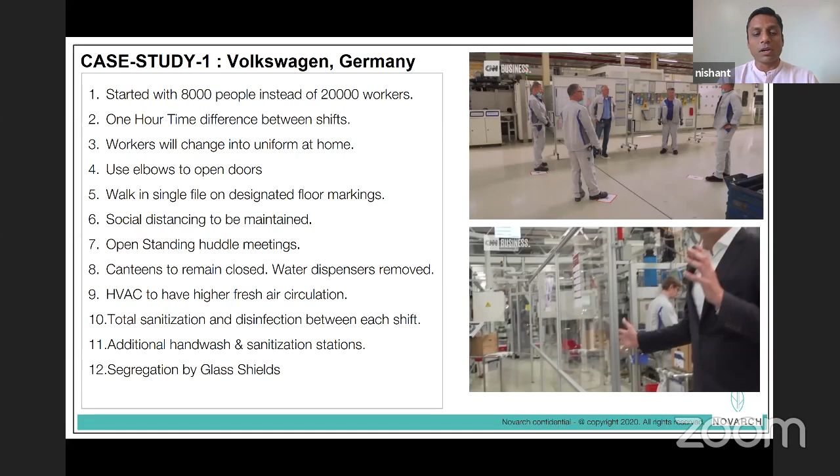The second case study is from Amazon fulfillment centers in India. They've implemented social distancing through simple floor markings. The cafeteria has been reconfigured for lesser seating while maintaining social distance. They've put in temperature scanning and thermal screening machines at various places, implemented sanitization stations, and for high traffic areas, plexiglass or barriers as well as PPE kits for all the people who man those areas.

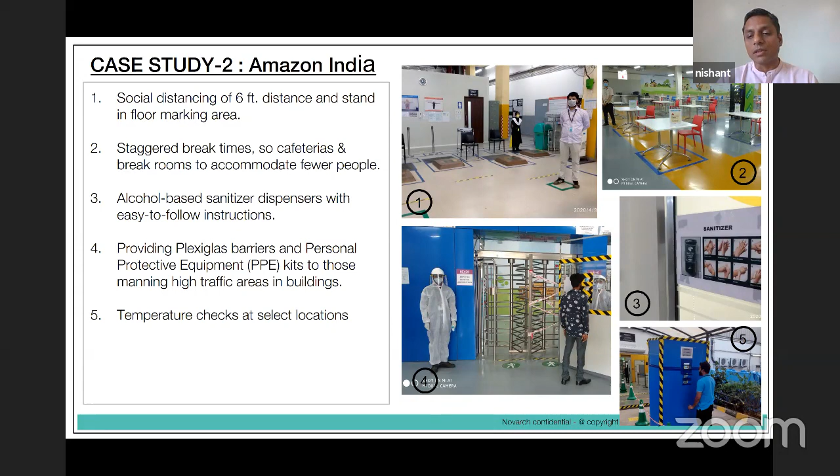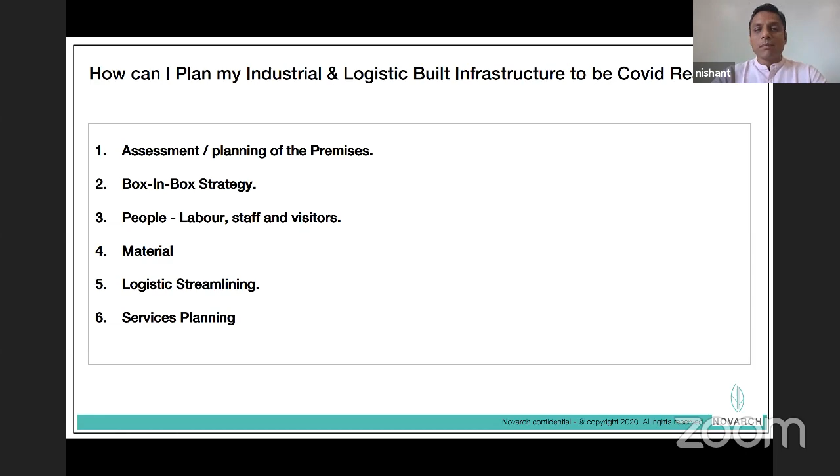So how can I plan my industrial and logistic infrastructure? We're going to talk about 6 main parameters. The first of those is something we call assessment and planning. Now this is extremely important.

For you to take a holistic approach, you need to sit down with your team and make charts for each and every item. How are you currently managing the workflow, the materials, the people, the visitors? How do you currently stack your material? What are the logistics of it? How does it come in, how does it go out, how does it flow within the premise? What are the various administrative or laboratory requirements you currently have?

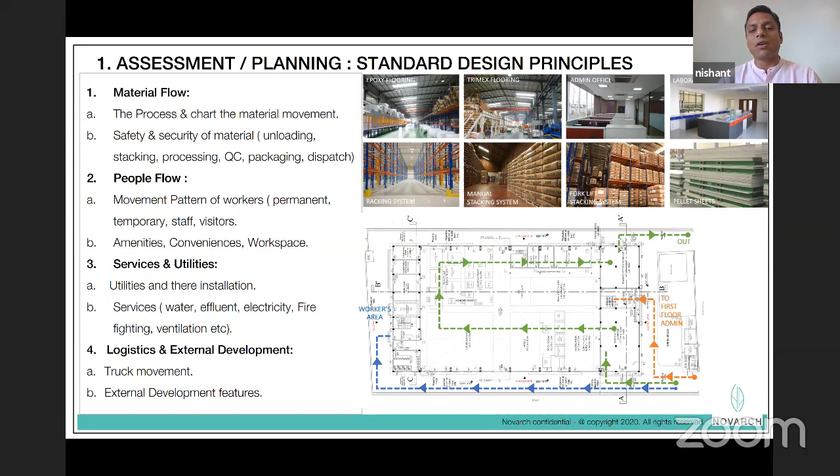Once you have all the information collated, you can implement solutions which are not haphazard but look at the entire picture in one go. If required, hire an expert to do it, or designate one of your project managers in-house to make these sketches, take photographs, and put everything together so you know exactly how your factory is functioning on paper today.

The second thing, a term we've coined, is called box in box. We're doing this in a lot of our projects currently. If I show you a typical factory layout, the area in the blue line typically tends to be a large production hall, probably of metal construction, a pre-engineered building, high volume with cranes running and things like that. We have machines and various departments scattered all over depending on material flow and how the factory is operating.

Now what we've brought in is that we've made boxes within. So make sure you channelize or earmark departments. For example, in this sketch I've made 4 departments: the first is fabrication, then 2 process plants, and then a QC packaging area. So try and segregate these departments.

What you'll have is a clean central line for all the material movement. Once you've segregated and implemented a box in box, you can start innovating, like staggering the in and out times of the workforce for each department. It could just be a 10-minute stagger. But as Vishal asked, how do you manage the queue? He's got more than 300 people working on a shop floor. So once you've got a department-wise, even a 10-minute time stagger for each department, it actually goes a long way in managing the queues for entry and exit.

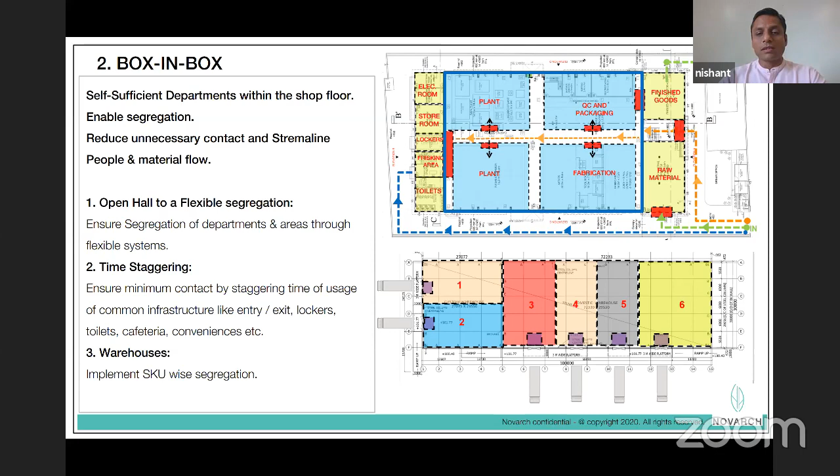Similarly, this is a large industrial cluster project of ours with numerous industrial units within the same area. We've started putting thresholds at the entries, in front of the institutional area, and at the beginning of the large common amenity area where the warehouses, power plants, sewage treatment plants, cold storage, etc. are located. There are also thresholds at the beginning of each individual unit, so you can limit contamination and not worry about it entering your premise from someone else's premise or an external source.

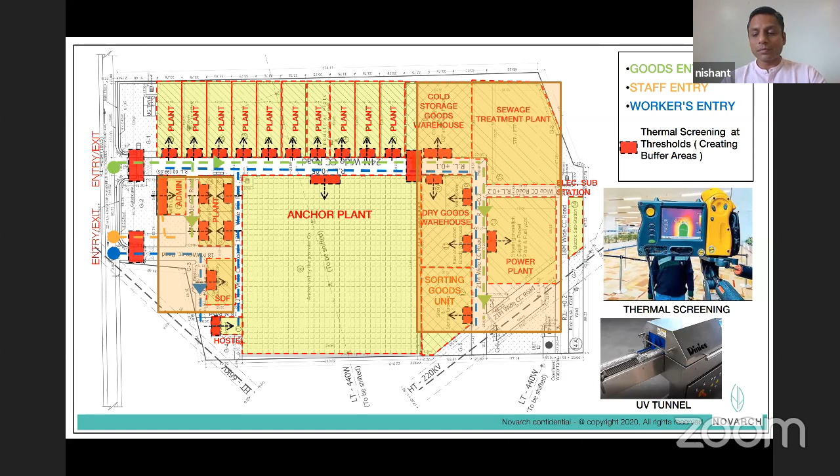So how do you actually implement this box in box? Very simple. There are a lot of movable screen types available, and I'll show you several of these technologies, which are actually very simple to do.

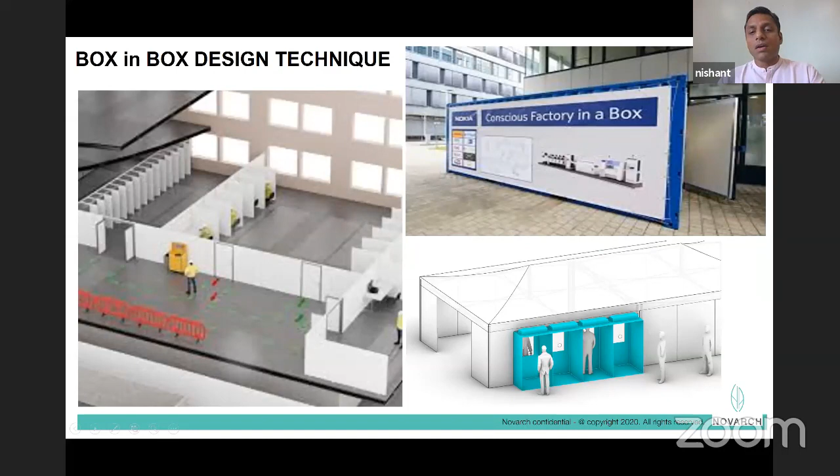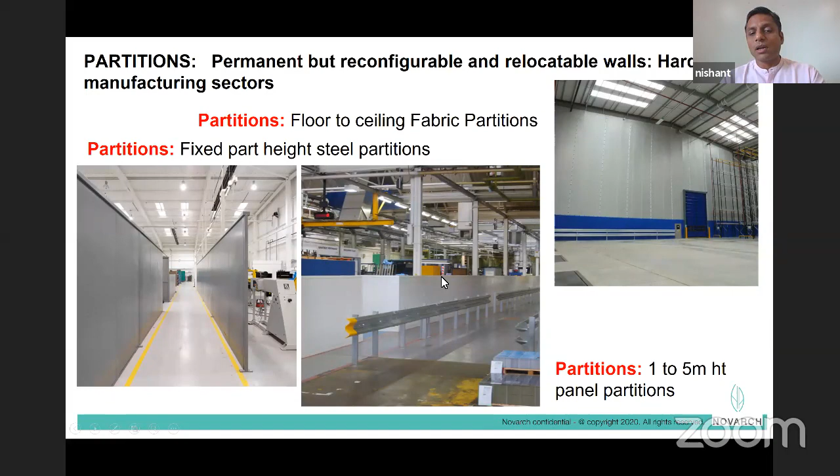The first one, like the image on the right, is just a fabric panel from top to bottom. If you have a lot of cranes running in your unit, you could have 7 or 8 feet high modular partitions which divide these departments and create these areas.

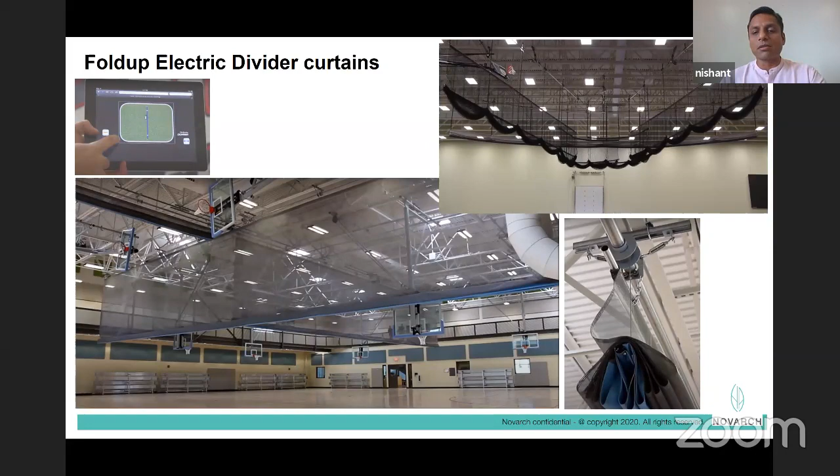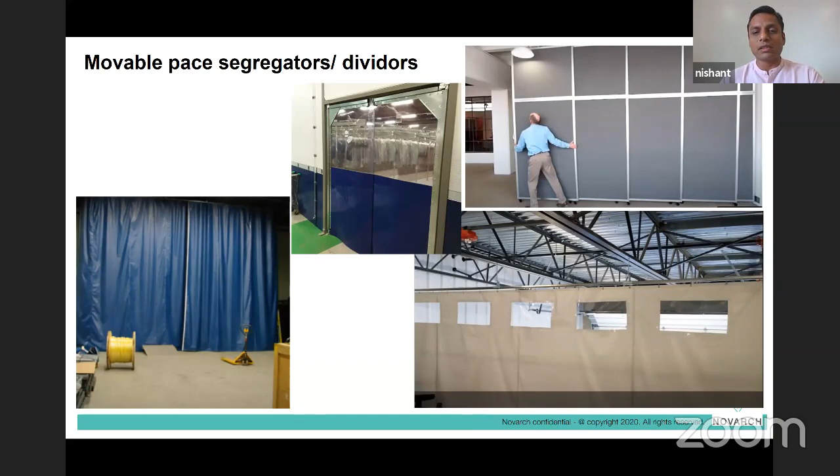You could have fold-up, electric-driven retractable curtains. You could just have movable walls, or take drapes and do it. You could have little windows or slits in these drapes to establish visual connectivity. Again, simple curtains can do it.

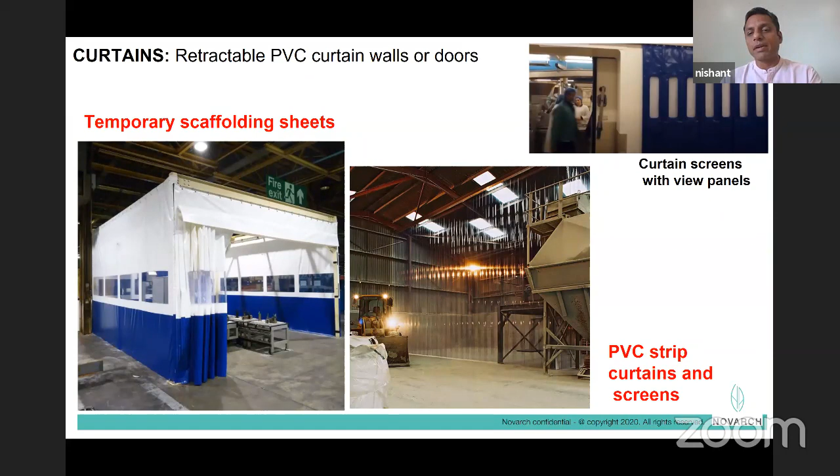Temporary sheets, either your scaffolding metal sheets or transparent PVC sheets—just simple, very simple curtain techniques which actually segregate your departments.

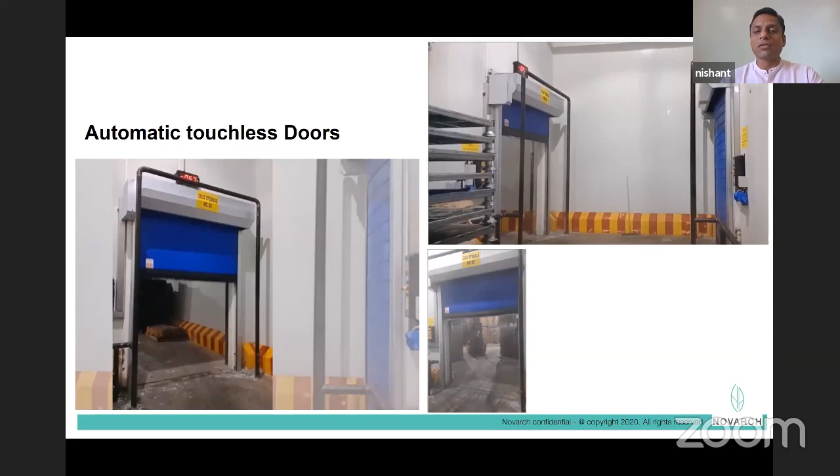Please relook at all the thresholds. Try and make them touchless, with automatic doors that lead you from one area to the other, because otherwise it's going to be very difficult to maintain these thresholds. It could be temporary stuff—of course this won't be very easily movable, but you could just go in for a temporary thing.

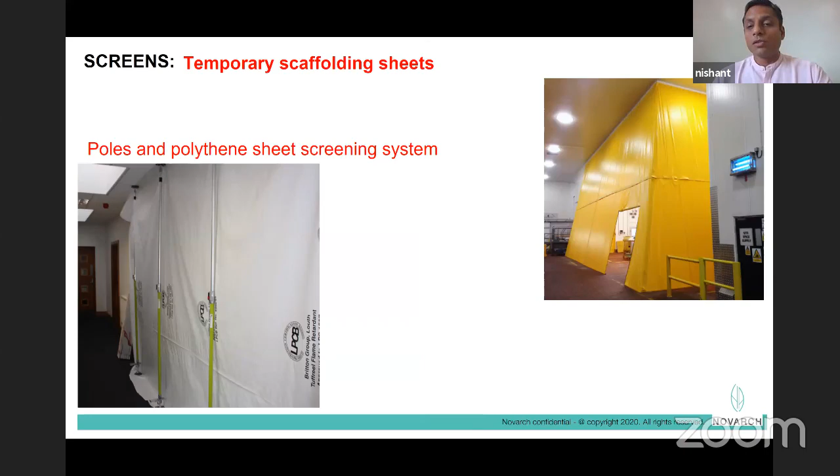So that is the box in box. The second most important factor is the people, the labor working in your factory. Safety and security is paramount because your people need to feel safe and comfortable.

A lot of devices are being used—clip-on buzzers on people's uniforms, thermal screening tapes. A lot of people are implementing cycles instead of walking within the campus. Social distancing, whether for food or whatever, and floor markings play a big role.

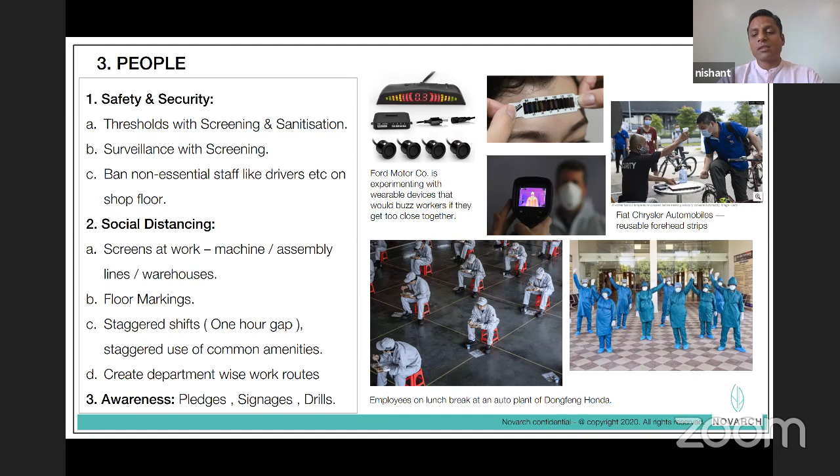I really want to talk about this photograph here—this is pledges. A client of ours has implemented this, so all the workforce twice a day has to recite a 30-second pledge about implementing social distancing and hygiene norms. When they recite this twice a day, gradually it becomes part of their DNA and they start adhering to it with minimum control required. So these are small things, but they can go a long way in getting the message across and changing people's way of life toward the new hygiene.

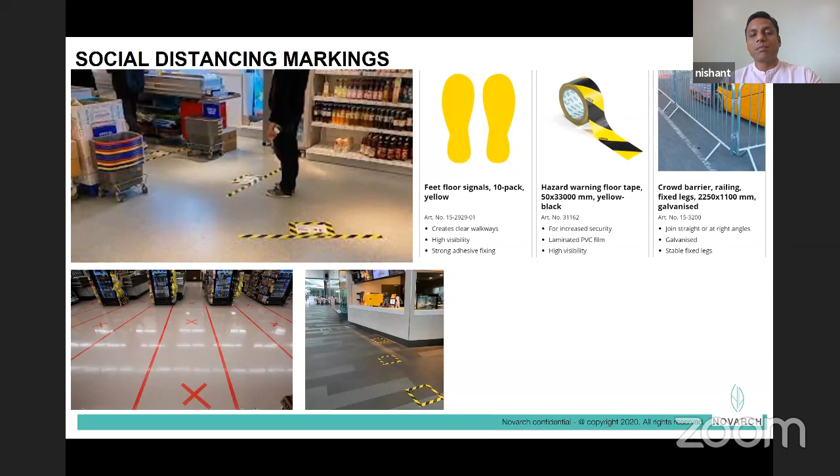Floor tapes, like I talked about, are very simple and easy to implement, giving people designated places to stand and work. You can do it in warehouses, defining paths with arrows so there's no cross traffic—ensuring only single-way movement with minimum merging of people. You could also put railings.

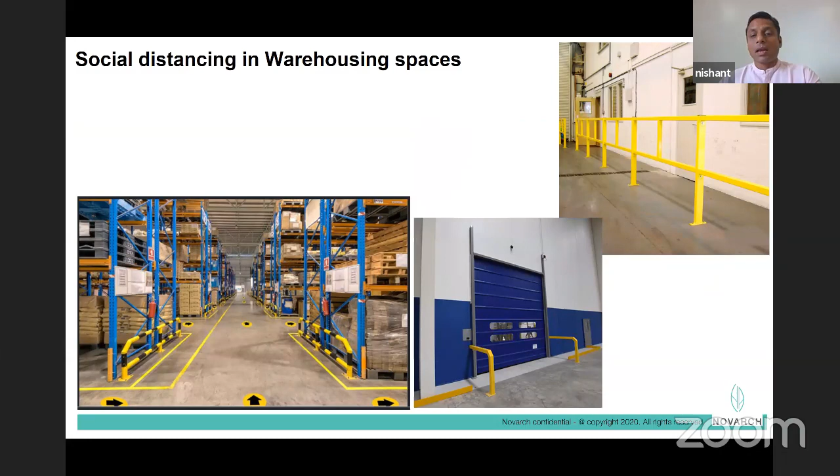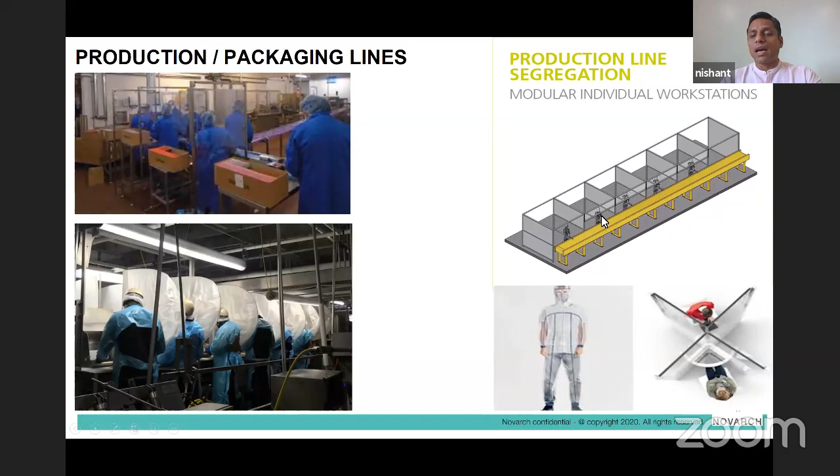Modular systems are available—simple modular partitions. For example, this is an assembly or packaging line with multiple people working on it. You can implement simple screens where people have their own little safe zone for work. Another example here shows these modular social distancing screens available in different types.

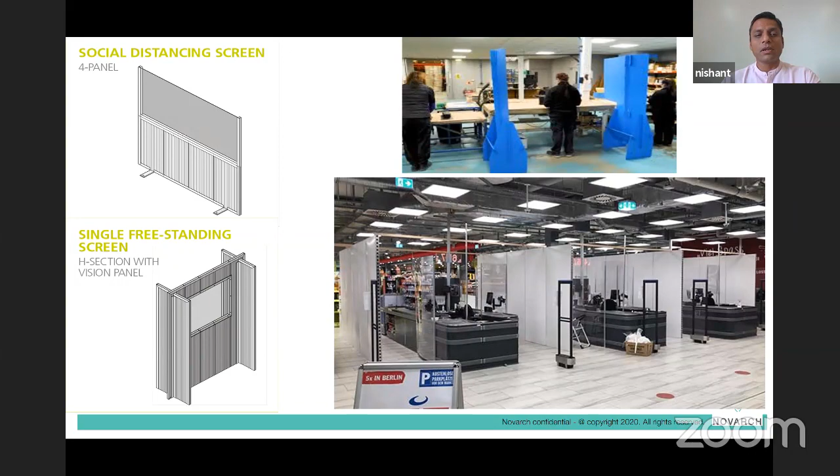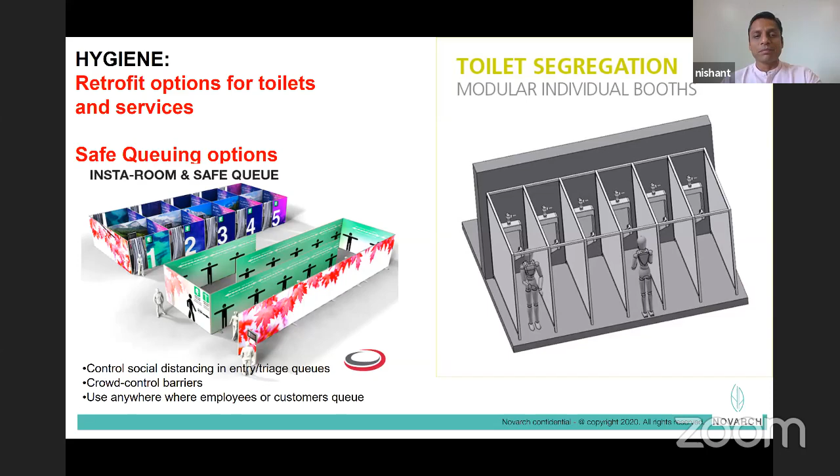And then a lot of these common contact spaces, like doors, etc. You get accessories now which you can clip on, and then use your elbows or arms to open it rather than your hands. And another interesting thing is, of course, the touchless sanitizing stations.

Another interesting point I've come across is that because of interdistrict movement being banned, while the workforce would be from the local village where your factory is, a lot of your supervisor staff would actually be staying in the city, and their movement has been hampered. So you might have to think of some innovative on-site shelter systems, where your supervisor staff can rest or stay for a couple of days at a stretch. That would be a very important addition to make.

Right, brings me to the third point, which is the material. So we talked about the box-in-box movement. What it actually does is, from my raw material store, I can now start making a simple alley for material movement. And this alley can be sanitized, let's say every 6 or 8 hours, just to maintain that level of hygiene within the campus.

You can use UVHammer lights, etc., in your material areas to act as a disinfectant for them. Touchless doors we touched upon. So please streamline material flow.

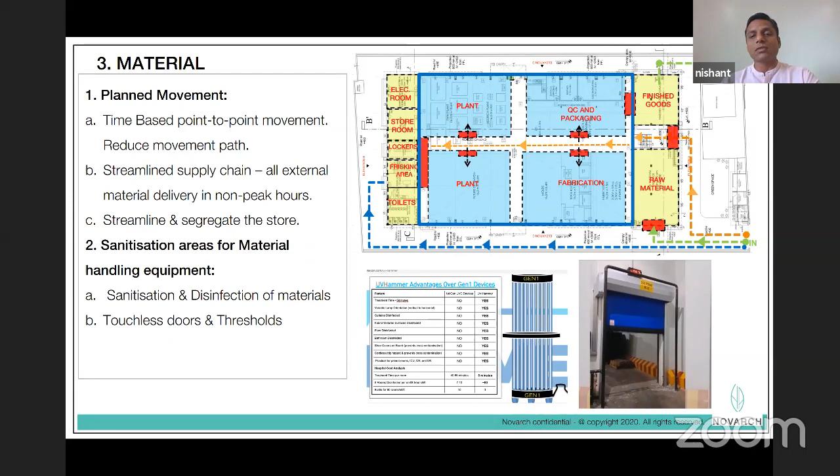For a lot of this, then look at some technology. Warehouses can actually use a lot of technology to automate their retrieval and stacking systems in various ways. You could look at bioturbo machines, which have ozone chambers to give a better environment into the factory. These are technologies currently used only for cold storages and such systems, but you can use them in any industry to increase the indoor air quality, so that it's easily disinfected and of much better quality.

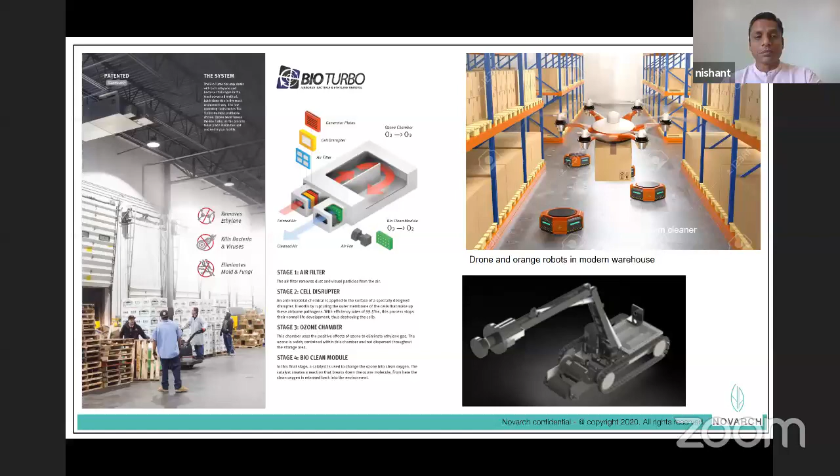Use disinfection mats. You get disinfection strips over which vehicles can pass, which disinfect their tires.

Logistics. This is a major issue because logistics is basically the transport of goods in and out of your factory. So you are now dealing with external ingress. There are going to be materials from your vendors coming into your factory as raw material, and there are going to be dispatches that you make. So how do you actually safeguard against this external ingress of material and people in your factory?

First and foremost, once you have these bubble diagrams and charts ready, you can chart the shortest way for an external vehicle to traverse inside your plant. So in this unit, we've got a very short distance for unloading, and a very short distance for the loading vehicle to go out. So most of my plant actually becomes ingress-free from external vehicles, it's just internal people there.

Similarly, for warehouses, clearly demarcate where the truck has to stand, clearly demarcate the threshold, keep a minimum distance there, so that you're not letting external goods or people make a lot of trips within your factory. Also ensure that all non-essential people, whether external people or your drivers, etc., are kept out of your shop floor. It has to be a simple norm that no external people will be allowed on the shop floor.

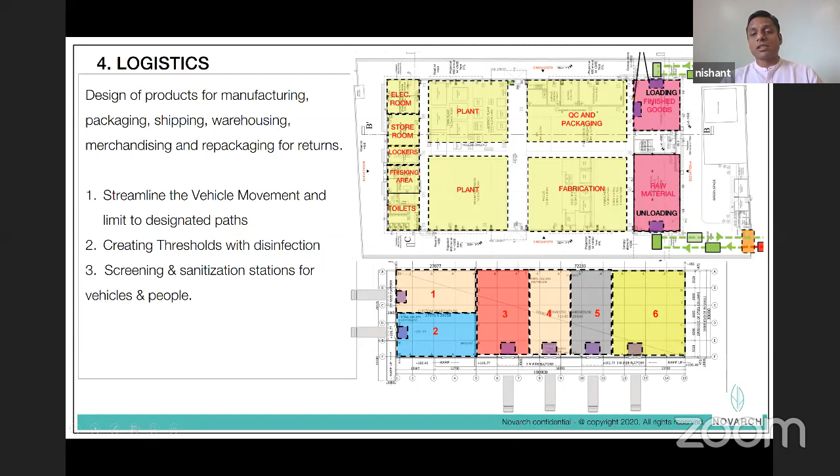Similarly, when you look at large logistic areas, like this container depot that we've done, you have to highlight the ingress points. And here you might have to implement disinfection stations for trucks as well, because there's going to be a lot of in-and-out movement of trucks.

You'll also have to have an area earmarked where all your logistic vehicles, like your reach stackers, your forklifts, and your various carts that transfer material from one place to another, are parked every now and then and disinfected before they go on their next trip.

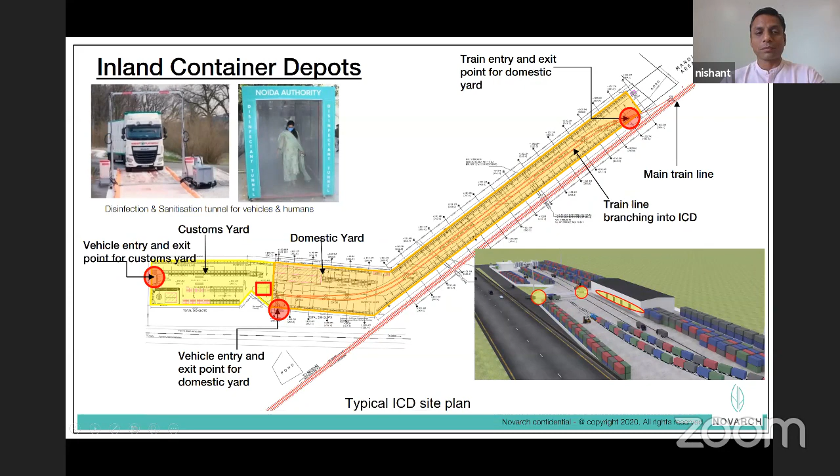Warehouse management systems - I'm sure you are already using a lot of these. A few of our clients have implemented complete automation in their storage, raw material, and finished goods areas, so that they don't have human interface at all. But each one suits themselves, so please discuss with your warehouse solution providers about how they can minimize people's contact, maybe through zone picking, voice picking, or complete automation.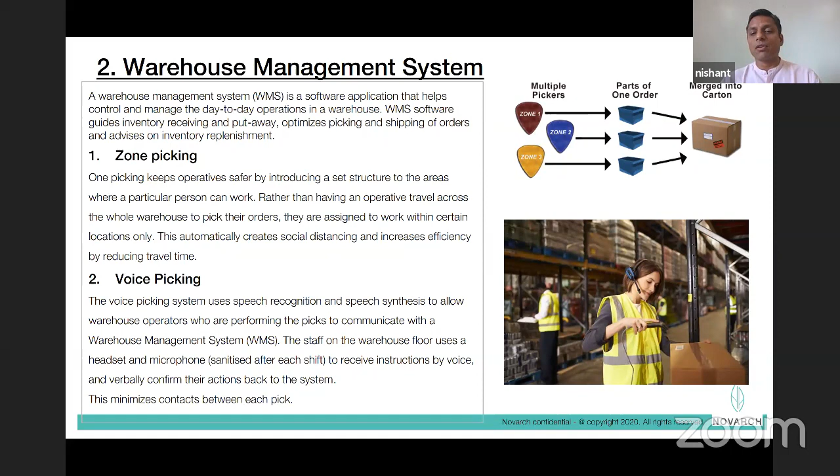Then for things like waste management, please ensure that whoever is collecting your waste is doing it in a clean, sustainable manner, taking it to the right dump site, and waste is not being scattered haphazardly, because waste is a very simple and big transmitter and carrier of contamination. Implement robots if you have to - there are small and large robots available. Please find the right robot for your industry and start implementing it.

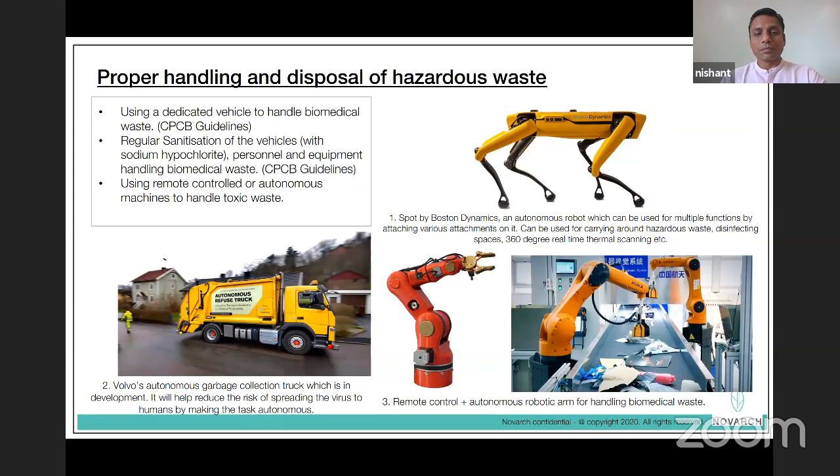Right, then we come to the services. Of course, ventilation is the main thing. The indoor air quality has to be at optimum level.

ISHRAE has specified guidelines for factories, and the major change they've made is that now you have to think about at least around 15 air changes per hour within your factory. So a lot of enclosed factories have to start looking at ventilation systems very critically, because that's one way to bring in fresh air and mitigate biocontaminants.

The other thing is that 70 to 80% fresh air shall be supplied inside industrial units to maintain positive pressure, so that we're not getting air from outside in, but even if there is any leakage, it's from in to out. A lot of factories use evaporative cooling, so please look at techniques to disinfect the water.

Maybe UV lamps is one solution. It's also been advised that after each working cycle, after each shift or every day, you flush out your evaporative cooling system. This would mean running it without water for about half an hour to make sure the cooling pads are dry, or running water circulating for 30 minutes to wash out any bacteria that has collected, flush out the system, and run it with fresh water the next day.

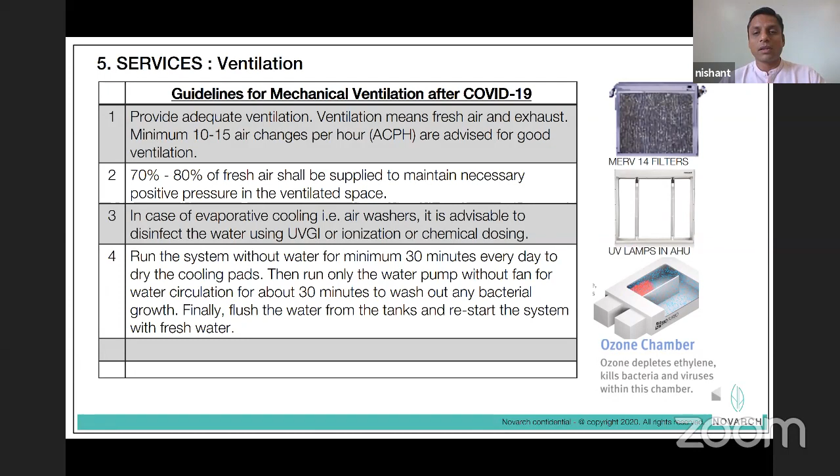So please look at your ventilation systems carefully. We are now re-looking at the ventilation systems of all our projects.

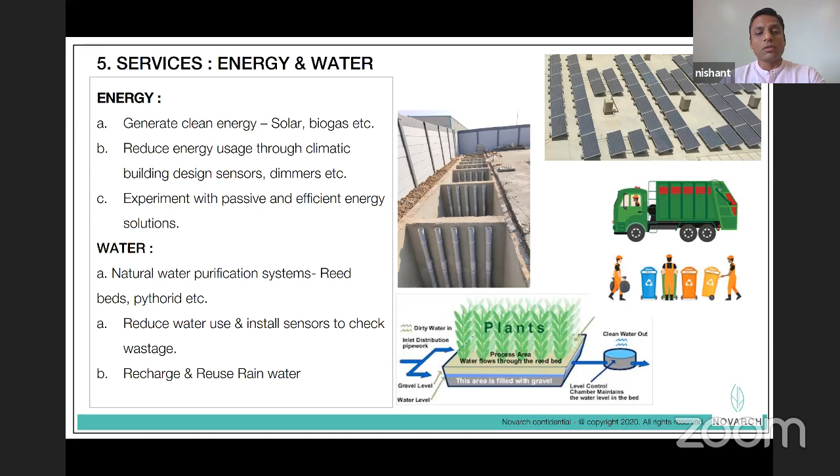And then energy and water. Please bring in energy efficiency, there are very simple ways of doing it - solar panels, biogas. Look at natural STPs, reuse water, recycle water, so you're not wasting any available resource. And look at the waste management system in your factory.

So those are some of the things we've highlighted. Let's drive change. Let's start talking about policy, building bylaws. Let's try and spread the word, so that all of us together achieve a good level of hygiene, safety, security within our industrial campus. We as a firm would be very happy to collaborate. If you want knowledge sharing sessions within your team or industry associations, please reach out to us, we'd be happy to help.